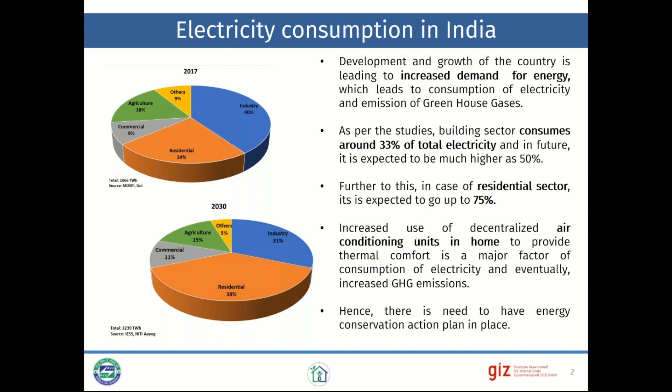Also, we have realized over time that the way we live is changing. The concept of thermal comfort that we demand is changing. We want more and more thermal comfort in our houses, and we need to check whether this kind of thermal comfort is being offered by way of energy efficient means. So there is an opportunity to save energy while giving comfort to people.

We have also observed in the last few years that electricity consumption in India's domestic sector is going up, with percentage growth of almost 9 to 13%. Post 2017, and even now after COVID, we are going to think of our indoor environments differently. We may need more air ventilation rates in our buildings so that indoor air remains healthy and clean. So things are going to change, and we predict that the demand for energy in the residential sector is going to go up.

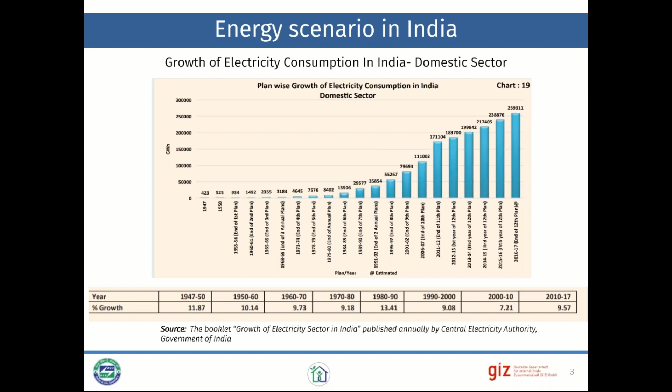So what has changed in the last few years? We have seen that in vernacular architecture, there was a lot of thought given to the environment. There was a very inclusive approach towards dealing with the indoor and outdoor environment. Architects considered the outdoor environment before designing the indoor environment, and what separated outside from inside was the envelope. When we say envelope, it's not only the envelope, it's the entire form of the building.

So in vernacular architecture, people took care to add more air into the building while restricting the heat coming inside. Even when the British came to India, they also had a very sensitive approach, and they dealt with fenestration in a very sensitive manner.

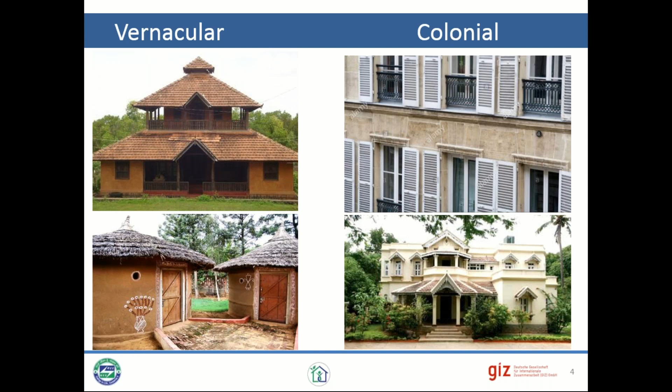This is what has happened to us now: we don't see any shading devices, we see a very casual approach towards designing fenestrations, and finally there is a lot of tussle between aesthetics and efficiency when we think of envelope design.

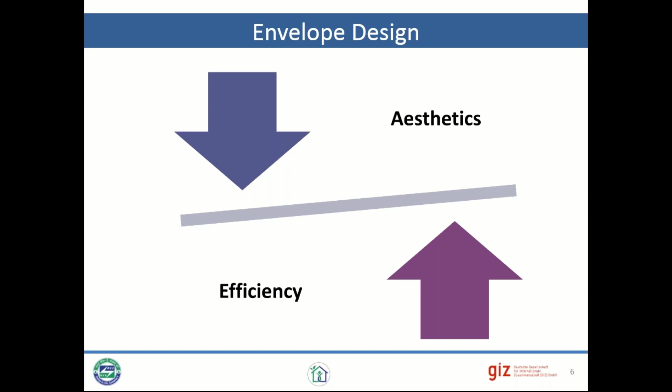As Saurabh sir had mentioned already, if a building is designed well, we capture energy efficiency for a longer period of time, because the equipment used inside the building can change and doesn't cost much, while changing the entire envelope of the building can never really be thought of at the operational stage. So it's very important to capture energy efficient measures in the envelope design and work towards efficiency while balancing aesthetics. This is what has happened to our facades nowadays.

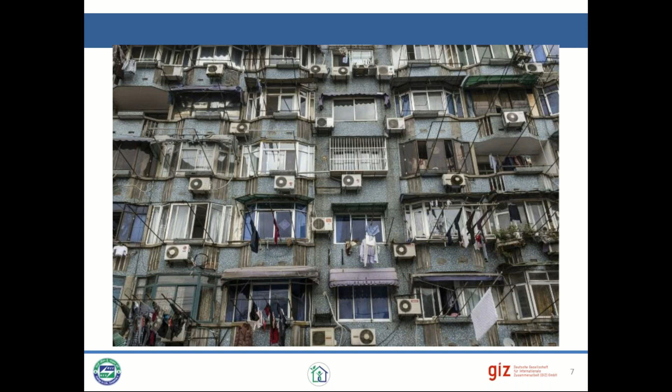You see a lot of air conditioners acting as components for aesthetic glamour on the facade. It's not only the facade architecture which is changing, but also the demand of energy, which is because of these air conditioners happening in the domestic sector.

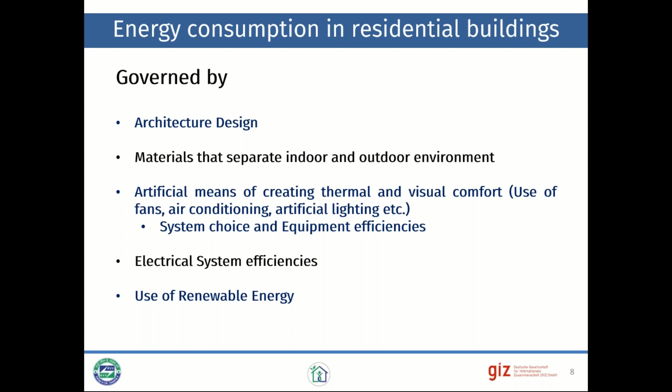So energy consumption in residential buildings is typically governed by architectural design, materials that separate indoor and outdoor environments, and artificial means of creating thermal and visual comfort. That would mean your choice of equipment and systems, electrical system efficiencies, and whether we can really go and use renewable energy. These are the factors we need to consider when putting in the seed for energy efficiency in residential building design.

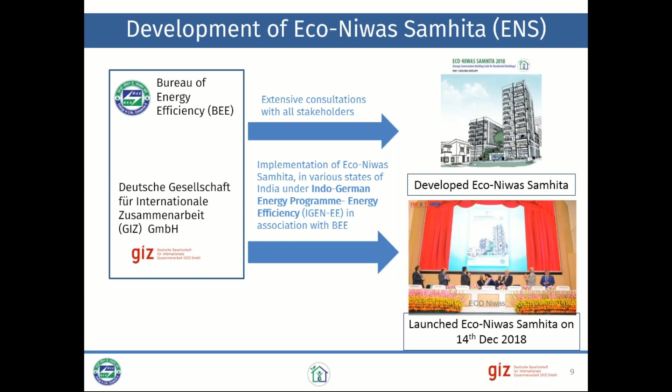So with this thought, the Bureau of Energy Efficiency and GIZ came out with Eco Niwas Samhita in December 2018, and it was launched and offered in the public domain so that people could start trying to use this kind of a code which can help capture energy efficiency.

The Eco Niwas Samhita had a major aim, and the first aim was to create comfort for people. The aim of Eco Niwas Samhita is to ensure daylight, natural ventilation, and reduce heat gains and heat losses, which would affect the thermal comfort of the people inside, and then later promote energy efficiency. So the code is talking of giving comfort at the same time giving energy efficiency.

The focus area of the code typically looks at building envelope, the mechanical systems and equipment in terms of your fans, your air conditioners, interior and exterior lighting systems, and electrical systems, the way they are designed and whether we can really use renewable energy.

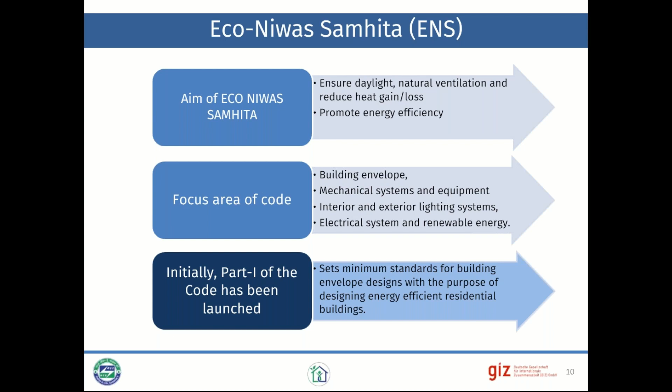Initially, part one, as Vikash sir mentioned, would be looking at capturing energy efficiency by way of architectural design and envelope design. The second part, being launched maybe coming year, would look at artificial systems. Right now, part one concentrates on solar passive architecture or climate responsive architecture, where architects have a very major role to play.

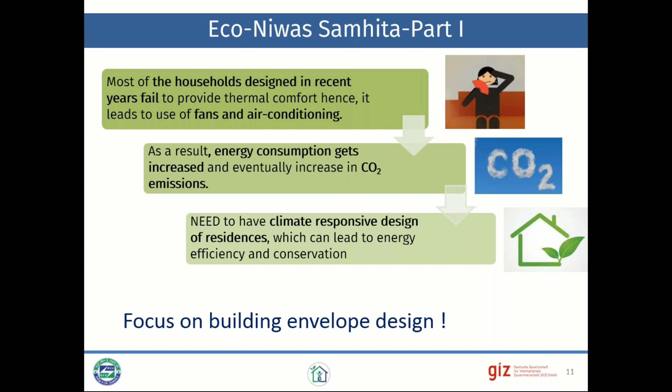So Eco Niwas Samhita part one is basically focusing on building envelope design and architectural design.

Now, how is this going to benefit the entire country? It is not only going to benefit individual users, but the entire country in terms of reducing energy savings by 125 billion kilowatt hour. It is also going to have energy savings of almost 20% compared to a conventional building, and also look at the national targets of reduction of CO2 emissions, which is almost about 100 million tons of reduction of CO2.

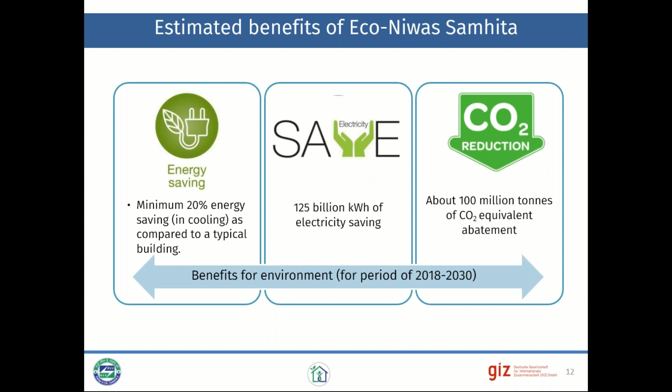And for individuals, of course, improved ventilation, thermal comfort, and availability of daylight, a healthier environment, which is becoming more and more the need of the times, and reduced electricity bills. So there is a win-win situation, not only for the entire country and the world as such, but also for the individual.

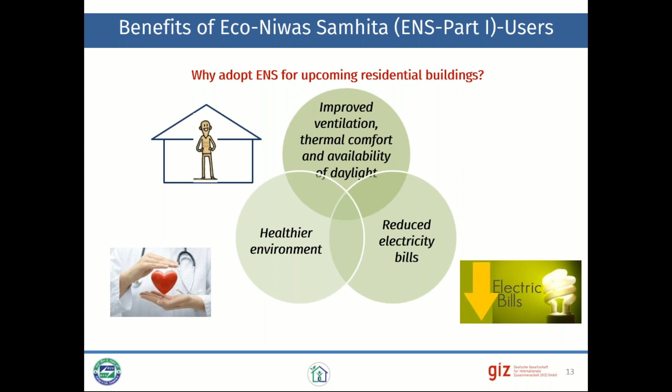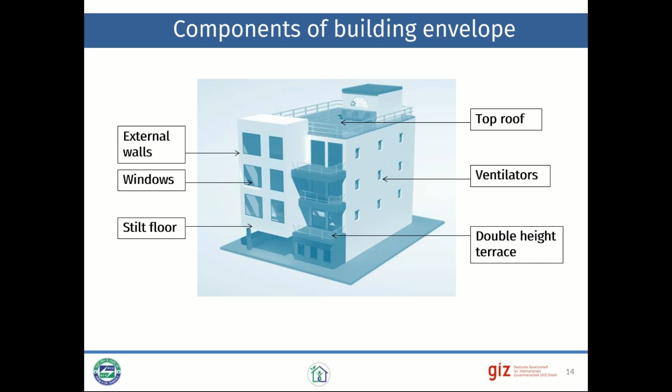Now, what are the components of building envelope that need to be looked at when controlling the energy utilization of the building? One is the external walls, the roof, the windows, doors which are on the external, if there are any ventilators, if you have any terraces, those can also be looked at as roofs, because that is where the heat is going to come in. And of course, the stilt floor if you have parking on the lower floor. So these are the components of building envelope which need to be concentrated and focused on when looking at your architectural design and choice of materials.

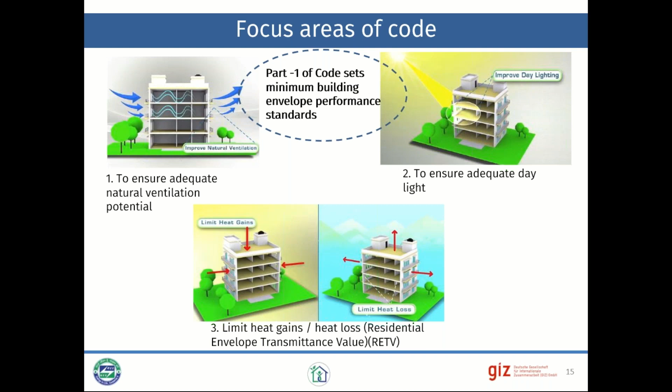So part one of the code sets minimum building envelope performance standards by way of ensuring adequate natural ventilation potential, also ensuring adequate daylighting, and looking at limiting heat gains and heat losses from the residential envelope, which is called RETV, which I'm going to explain later in the further slides.

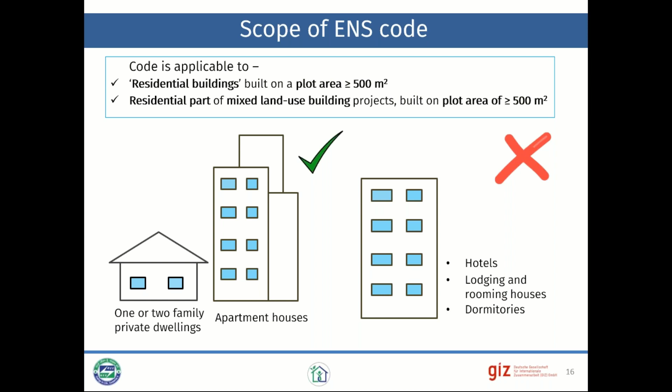The scope of the code is applicable especially to residential buildings with a plot area greater than or equal to 500 meters square, and the residential part of mixed land use building projects built on plot area of more than 500 meters square. One family house, bungalow, two family house, row houses, apartment houses are covered and are in the scope of the ENS code, while commercial buildings which are used for residential purpose but which are commercial, like your dormitories, hostels, hotels - all these will not come under the purview of the ENS code.

Now, whenever we think of looking at energy efficiency, like I said earlier, our predecessors had looked at the climate, and then designed the envelope or then designed the architecture. So it becomes very important to look at the climate zone where the building is being built.

Once we realize that energy consumption of a building necessarily happens to keep people indoors comfortable, and when the climate is putting stress onto these kinds of comforts, people tend to use artificial means, which then utilizes energy. So we have to understand that if a residence is in a climate with maximum climate stress, like a hot-dry climate where you are going to have a lot of heat stress happening, compared to a temperate climate where probably the heat stress is not so much.

So a residence built in hot-dry climate will need more energy to keep people comfortable. And one of the primary aims of the code is also to look at whether people are comfortable inside. So when the code talks about certain benchmarks, it takes help of this climate zone in India to set the benchmarks. So the benchmark for energy consumption of a residential building in a hot-dry climate would be slightly higher than the benchmark for a temperate climate.

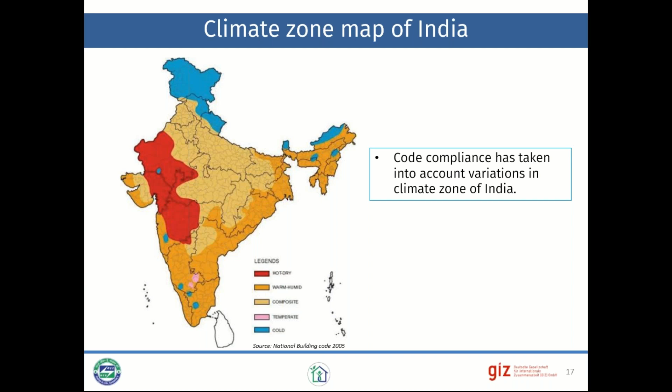When we look at Maharashtra, a lot of work had happened earlier, and you find that Maharashtra has been divided into different talukas, and each taluka has a climate. This reclassification of climate in Maharashtra was done pretty early, and there are 4 different climate zones: cold, composite, warm humid, and hot and dry. So when designing in Maharashtra, you may have to refer to these climate zones and look at the benchmarks given for them in the code.

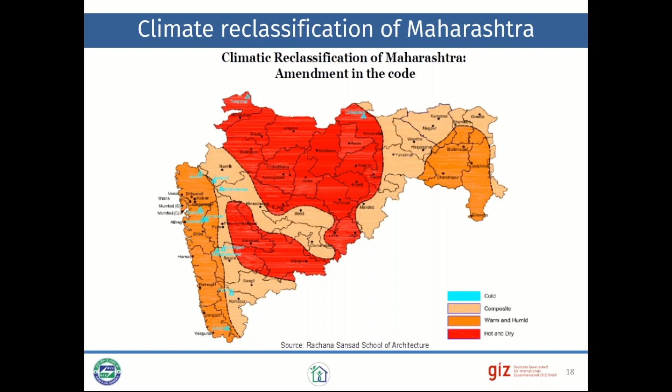Now, what are the code provisions? In summary, the code looks at natural ventilation, daylight, and heat gain and heat losses. So it controls these things.

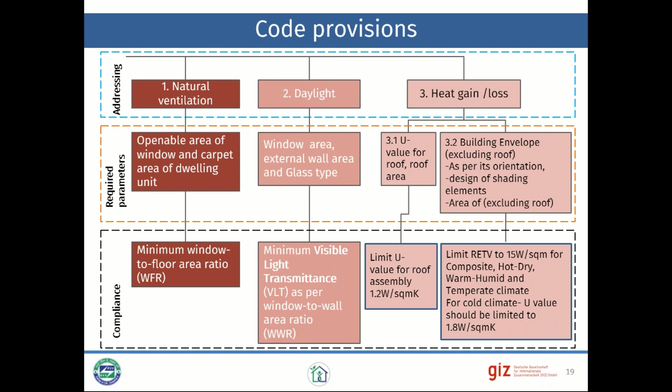In what way does it control? Natural ventilation is controlled by way of the area of windows compared to the carpet area of the dwelling unit, and it also looks at the minimum window to floor area ratio. When assuring provision of good daylight, it talks about the window to wall area ratio, the glass type being used, and the property of the glass which allows light to come in. And when controlling heat gains and heat losses, it looks at the thermal properties of different building envelope materials, whether opaque or transparent.

So when we look at the first aspect where the code talks about natural ventilation, it controls the openable area of window compared to the carpet area of the dwelling unit, and it also looks at minimum window to floor area ratio. What is the provision given?

Here you see in the picture a window, typically like a casement window, and you'll find the term openable area of window. The openable area of a casement window is going to be different compared to a sliding window. So it is not just the opening given in the opaque facade, it is the way the window is chosen - whether casement, sliding, 2-track, or 3-track. Even though the opening in the facade is the same, the openable area of the window can change.

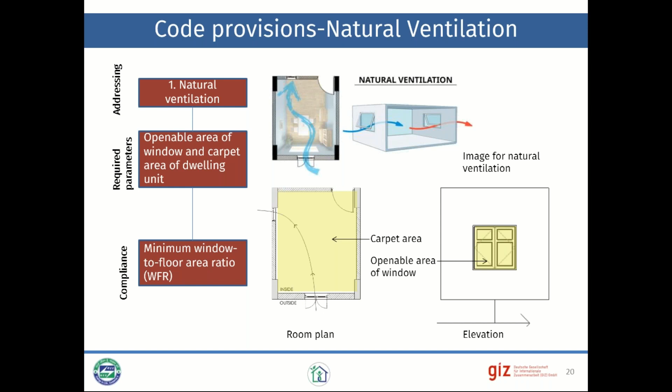So the provisions are such that minimum openable window to floor area ratio, and minimum window to floor area ratio with respect to the climate zone, shall not be less than given in the table. You will have to look at the building and the climate zone in which it is being designed, and then look at an appropriate minimum window to floor area ratio. You will have to give your window area more than this minimum, as benchmarked by the code.

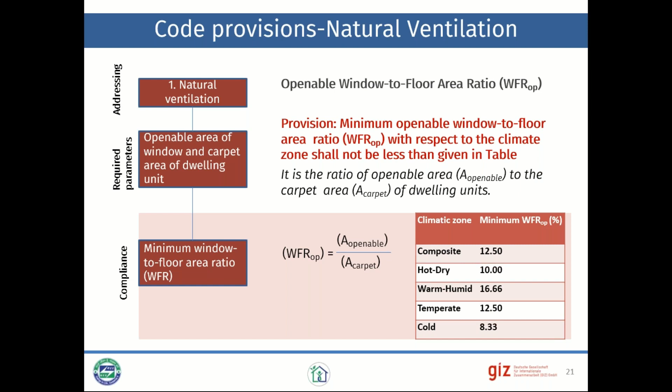Now the next provision is about daylight, and the code talks about how you can assure enough daylight is available by way of window area compared to the external wall area, and of course the glass type. So it's not only the opening, it's also the material of the opening, which is the glass. At times you may have louvers, so how do you deal with those? It will look at the visible light transmittance, which is actually the daylight that can come inside compared to what falls on the pane.

So the visible light transmittance of the glass is a property of the glass, and you can read this property in the technical sheet provided by the glass vendor. This becomes very important, and you will have to understand that more the VLT, more daylight.

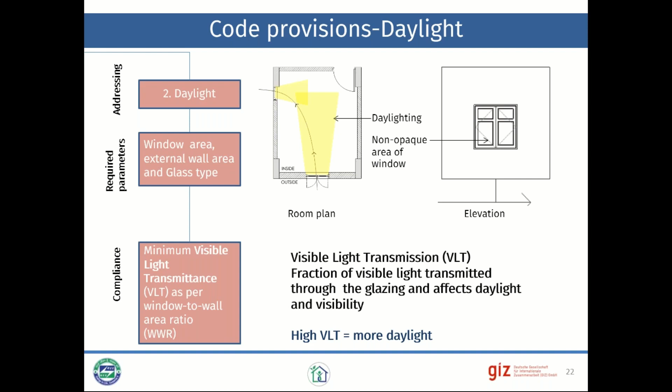The provision by the code says that minimum VLT of the glass used in non-opaque building envelope components, which are transparent or translucent, shall comply with requirements with respect to window to wall area ratio as given in the table. One understands that more the window to wall area ratio means more openings, means more daylight. So if you have more openings, you can use a glass which allows a little lesser light to come in - larger the amount of openings in the envelope, lesser the VLT can be used.

So it gives you the minimum VLT, which assures the amount of daylight that comes in. If you're assessing or designing a building, you will have to see that if your WWR is somewhere between 30 to 40%, then your minimum VLT has to be 0.20. This controls the kind of light coming in and assures good daylight for the occupiers.

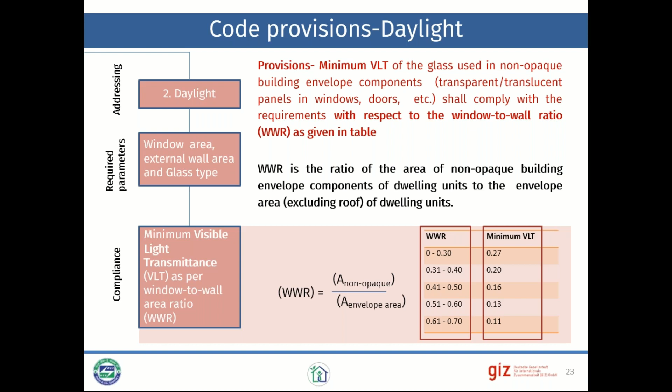Now the third part, which is control—the code controls the heat gain and heat losses that come in from the building envelope. These are the opaque assemblies specifically, so you have to understand the roof, the external walls, and the fenestration.

Because fenestration has certain material to it, we have to control the thermal properties of these materials to restrict the heat coming in or going out to achieve thermal balance. If you give thermal comfort to people through architectural design, they won't resort to artificial means for comfort. So the code provides that the thermal transmittance of the roof shall comply with the maximum U value of 1.2 watts per meter square Kelvin.

Now, what is this U value or thermal transmittance? Thermal transmittance, also known as U value, is the rate of heat transfer from 1 square meter of a facade when the temperature difference across this facade is 1 degree. Typically the unit for thermal transmittance is how much watts is coming in from 1 square meter when the temperature difference is 1 Kelvin.

So you now understand that lower the U value, which means lower the heat transmittance, which means lesser heat gain inside in hot climates, which means better thermal comfort and lesser energy consumption. So here the code specifically asks you to look at the roof assembly and gives a benchmark for the U value, which is 1.2.

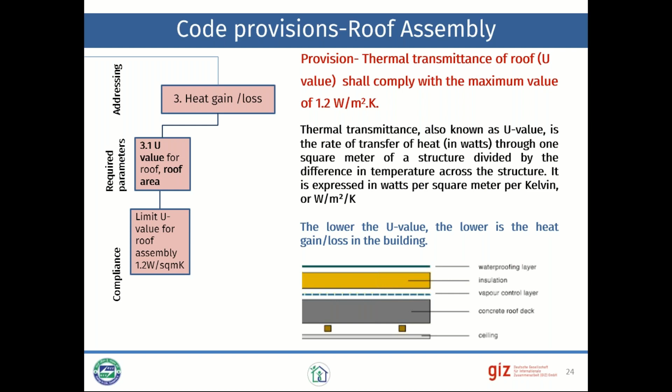Now what about the other envelope? The code deals with the roof separately and deals with other components of the building envelope separately. Why roof separately? Because we all know that the roof, or the horizontal surface, receives maximum solar radiation—almost twice that can fall on other surfaces. This data is available in national building codes, and you will relate that the roof is a major culprit in terms of heat ingress into buildings. So the code looks at roof differently and the building envelope separately.

Now, when we start looking at the building envelope except the roof, what all comes into picture? You see that wall material is very important. The U value of the envelope becomes very important, because it checks and controls the heat gain or loss happening through the wall.

Then there's the orientation of the facade on which the windows are placed. Typically, if the orientation faces the sun for most of the time, one easily predicts there's going to be a lot of heat gain by way of solar radiation. So when wall material is controlled, you're controlling conductive heat gains into the interiors, while when looking at orientation and openings, we're controlling both conductive heat gain and heat gain by way of solar radiation.

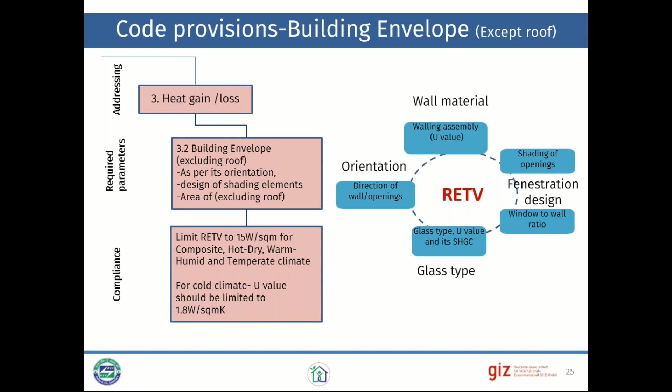So it's an integrated approach to reduce heat ingress and loss in a building envelope. It also looks at the material of the fenestration. With this integrated view, the code gives you a term called RETV, residential envelope transmittance value. This is a very important term and concept, giving an integrated control over all these 4 or 5 aspects of the envelope.

Residential envelope transmittance value is the net heat gain through the building envelope of the dwelling units divided by the area of the building envelope. The unit here is how much watts is coming in or going out per square meter of envelope. Typically, limiting the RETV value will help reduce heat gains from outside into the building and improve thermal comfort.

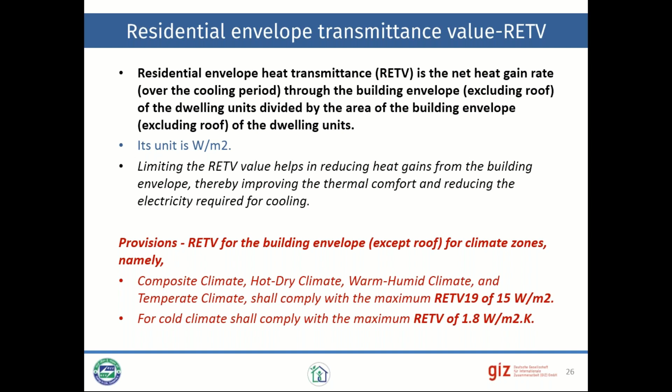So how does the code deal with it? The provision says that RETV for the building envelope varies by climate zones. So here climate zones come into picture, with different benchmarks. For composite, hot-dry, warm-humid, and temperate climates, it shall comply with a maximum RETV value of 15 watts per meter square, while for cold climate, it shall comply with a maximum RETV value of 1.8 watts per meter square Kelvin.

So what is the formula for calculating the RETV, and what does it consider? You will find that it has an integrated viewpoint of looking at walling assembly and its orientation. Thermal conduction is controlled from the opaque building envelope components, while solar heat gain is controlled from the transparent or non-opaque components of the building. So the formula takes into consideration these three aspects.

It also gives you an orientation factor, because as I said, orientation change would mean change in heat gains, since the solar radiation falling on different orientations is going to be different for different climate zones, for different latitude and longitude. There is one more aspect to this formula, which is A, B, and C. These are coefficients given by the code to tackle the orientation.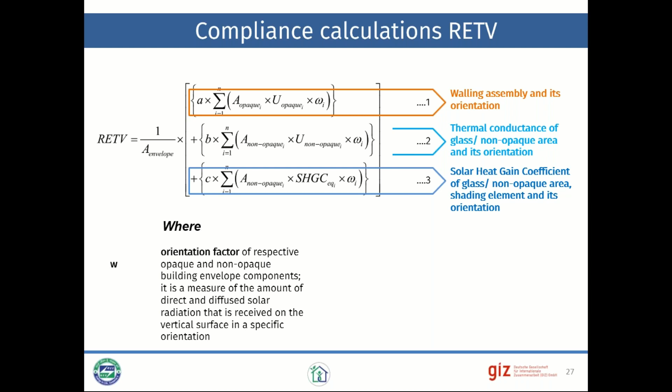Now, when we are looking into this code, the formula for calculating the RETV also allows you to take a different value for the heat gains that is happening through windows.

One understands that if there is a window and there is solar radiation coming in from the window, the moment you give a shading device, the amount of solar radiation entering the indoor space is going to be lessened. Now, how does this work? Let me first tell you what is SHGC.

Solar heat gain coefficient is the amount of solar radiation that comes in through an opening compared to what falls on the glass. This ratio is the solar heat gain coefficient.

Now imagine solar radiation falling on an opening, say let us consider it 100. If the glass has an SHGC value of 0.5, that means only 50% of this 100 is going to come in, which means the inside heat, that is solar radiation reaching the interior, becomes 50.

Now imagine you have given a shading device, and because of this shading device, not all of that 100 solar radiation will come in. Say only 75% will come in, which means the solar heat gain coefficient of that opening changes. So 75 is what is going to come in instead of 100, and with the glass having a 0.5 SHGC, 50% of 75 is somewhere around 37.5. So only 37.5 will enter, even though the outside solar radiation is 100, which means the solar heat gain coefficient of the entire opening, not only the glass, the way the opening behaves, changes.

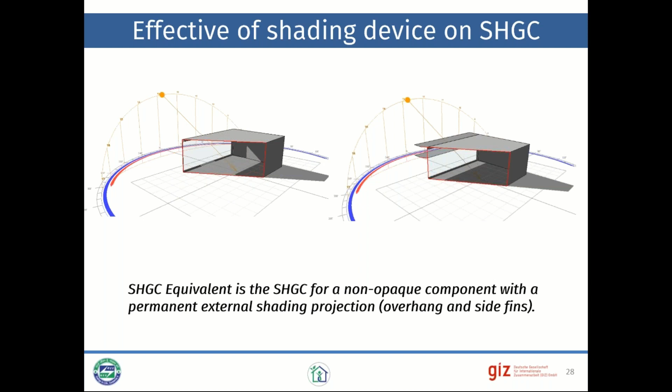So with a solar shading device, you're able to reduce the effective SHGC, and this is what is being considered in the code as well. Once you know the effective or equivalent SHGC, it can be used in the RETV formula to calculate your RETV, which then has to comply to the code values given.

So step-by-step code compliance is what we are now going to go into. For composite, hot, dry, warm, humid, and temperate climate, this is the way you'll have to look at the compliance.

So first and foremost, look at whether appropriate ventilation is being given by way of checking your openable window to floor area ratio, and then check whether it is compliant to the requirements of the code.

Then you start looking at the visible light transmittance of the non-opaque building envelope, and then appropriately check the minimum VLT as per the WWR of your design and check whether it's compliant.

Move further, then you start checking whether the roof thermal transmittance that you have proposed in your design complies with the maximum U value of 1.2 watts per meter square.

Once this is done, then you can start looking at the entire integrated approach towards the envelope, except the roof, where residential envelope transmittance value needs to be calculated for your own design. And then you have to check whether it complies with the maximum RETV of 15 watts per meter square.

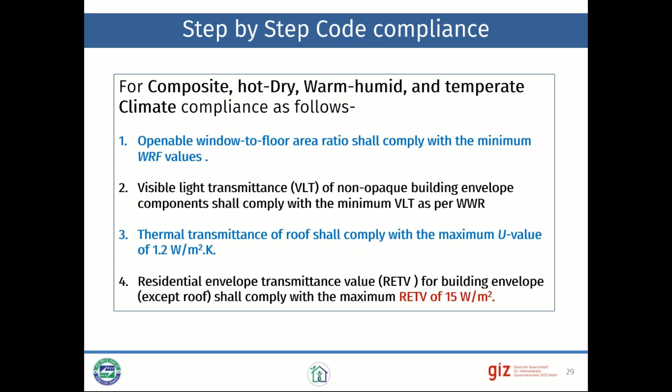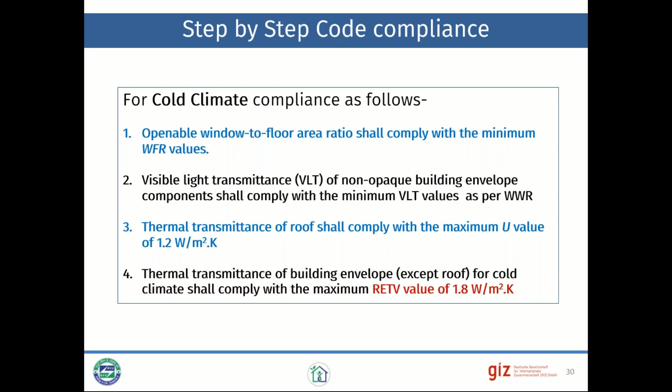Now, how do you check this compliance? BEE has already provided a tool—a Java-based ENS compliance check tool available on the Bureau of Energy Efficiency website for download. The link is given here, so those interested can download this tool and use it to check compliance.

It's a very easy to use tool, and you can start playing with it to understand how changing the WWR of your design, the walling assembly, or the roof assembly affects your compliance to the code.

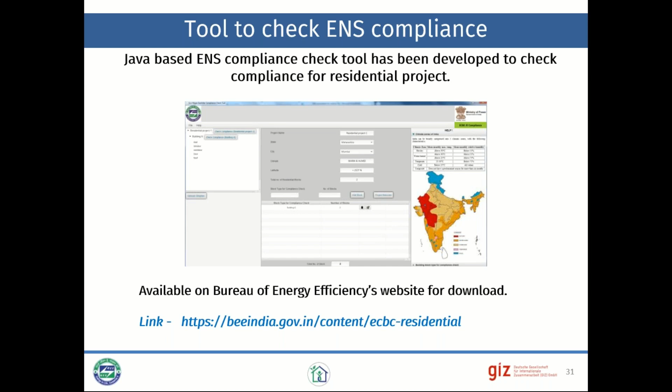With this tool, you need to enter data related to the building envelope—material, area, orientation, shading elements, glazing type, everything that needs to be looked at. Then compliance can be viewed for each building and a detailed report can be generated.

When looking at each building, we first look at the dwelling types and check compliance for each dwelling type. When all dwelling types are compliant to the code, the building becomes compliant to the code.

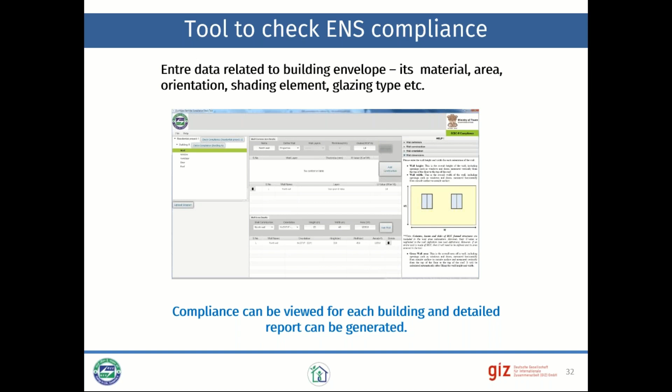So we are going to look at a case example to understand ENS compliance. If the case I'm discussing is not compliant for certain aspects, we'll change a few characteristics of the building design to achieve compliance. This will be a step-by-step way of achieving compliance.

Let's take an example in Nagpur, hot dry composite climate. It's a standalone building with P+5 structure, 10 number of buildings. This is a typical layout.

These details have to be entered into the tool—it's not online, you can download it, it's a Java based tool. So you can enter these things first, and the tool understands the context of the residential building.

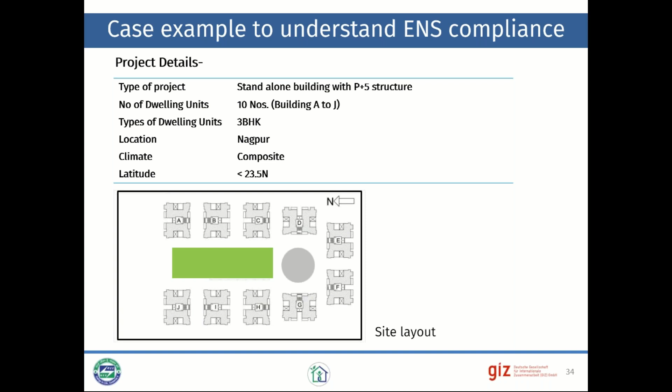So what is the method? First check building type, whether residential or commercial, across the entire site, and identify which are residential buildings versus commercial buildings—then look at only residential buildings. Then identify a typical building with respect to its planning, and check orientation of the typical building. If a plan has different types of buildings, all buildings will have to be taken separately and shown compliance too.

Further, check configuration of the dwelling units in the identified typical building and understand the number of various types of dwelling units. If you have one typical dwelling unit which is maybe 10 in number, you need not do the compliance check for all—if you've done one typical, all others will be compliant. Except a typical dwelling unit would also need to consider the same orientation. So if you have the same plan but it changes orientation, then it is not a typical dwelling unit.

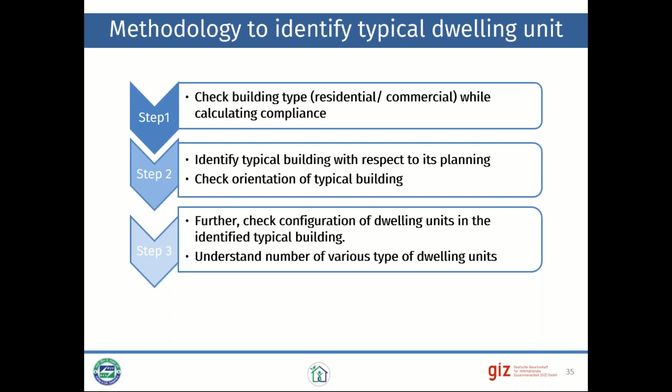So for showing ENS compliance right now, when I'm demonstrating, I will take only one building and one typical flat to show compliance. You can repeat this kind of thing for other orientations and other buildings.

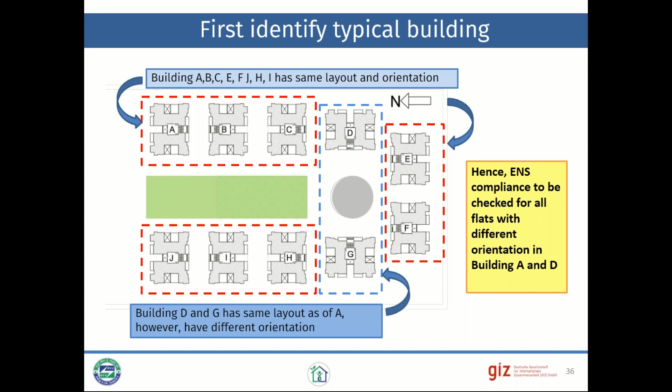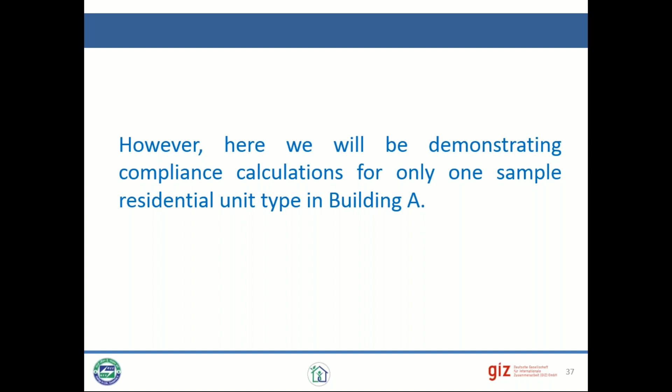So we are demonstrating compliance for only one sample residential unit type in building A. There are two flats with the same planning but different orientation, so they are not a typical type—these are two different types, and we are going to show compliance for only one unit.

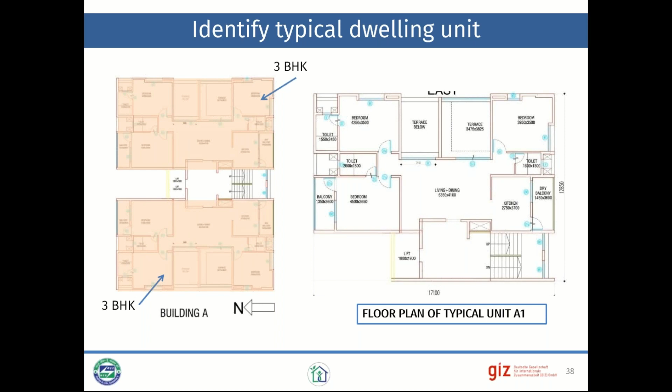Let's start understanding the building envelope details of this particular dwelling unit or flat in the apartment. The wall assembly is typically 230 mm solid burnt clay brick with 20 mm external cement plaster and 15 mm internal gypsum plaster.

The roof assembly is 180 mm thick RCC slab with 25 mm dense concrete on top, 100 mm thick brickbat coba, 15 mm finished with IPS flooring over 25 mm concrete laid to slope to drain away water. Windows and sliding doors are 5 mm thick single clear glass with aluminum powder coated frames. Doors are typically factory press laminated doors, 40 mm thick. Currently there are no shading devices provided for windows and glazed doors on the exteriors.

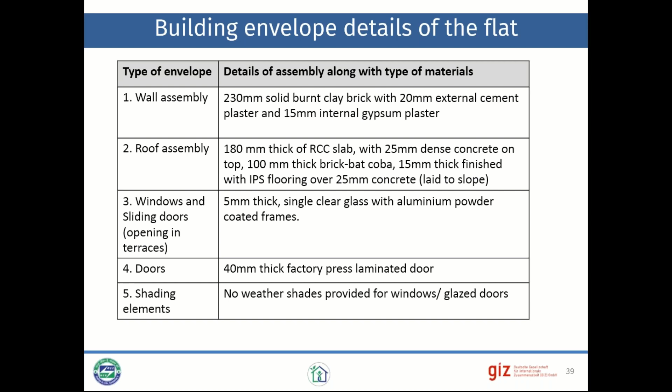Now let's start checking the ENS compliance. After entering all the details of building A and that particular flat into the ENS compliance tool, we find the compliance results, starting with window to floor area ratio for that dwelling. I'm not yet talking about the building as a whole - we have to do it dwelling by dwelling.

So WFR, window to floor area ratio, calculated value is 16.48, and compliance required as per ENS is 12.5 - that is the minimum compliance. So it is showing ENS compliance because it allows more ventilation and therefore better indoor conditions. The VLT, visible light transmittance, works out to 85%, while compliance required is minimum 27% for the WWR. So here also you find that the building is compliant.

Then we start looking at the U value of the roof, or the thermal transmittance of the roof. The calculated value is 2.06 watts per meter square Kelvin, while the compliance requirement is 1.2 watts per meter square Kelvin. So the U value of the roof is higher, almost double what is required by the code. This means it is going to allow more heat to ingress, and therefore thermal comfort is not going to be good - it shows non-compliant.

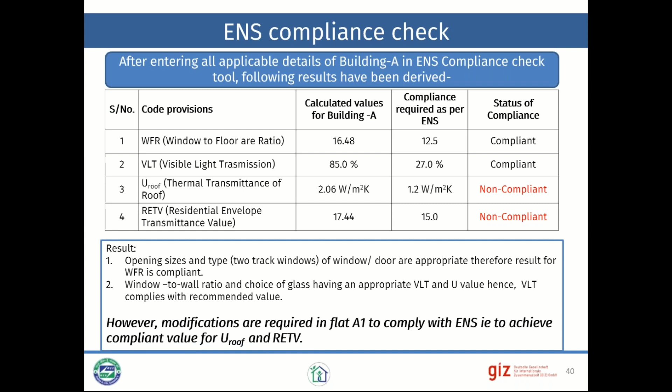So opening size and type, which is 2-track window and door, are appropriate, and therefore WFR is compliant. Window to wall area ratio and appropriate choice of glass with appropriate VLT and U value are chosen for this project - with correct VLT it complies with the recommended value. However, we'll have to do some modifications in flat A1 to comply with ENS and achieve a compliant value for U roof and RETV. So now we are going to see what we can do for the roof first.

When we look at the as-is roof, the U value works out to 2.062. Now we consider overdeck insulation for the roof and calculate the U value again. After calculating the U value, it needs to be entered with the respective floor area into the compliance check tool, which will overall calculate the U value for the roof and we check compliance. So the modified roof assembly with expanded polystyrene 50mm, applied as an addition to the roof assembly specification, gives a U value of 0.55, which becomes compliant with the requirement of ENS.

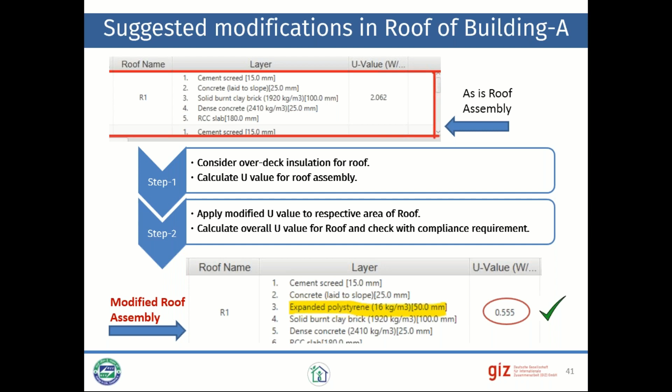Now when we look at RETV, we decided not to do all the measures at one time - let's try modifying the envelope one by one. First we check the as-is case for RETV compliance. If not compliant, we give an overhang shading to the window and check compliance again. If compliant, fine, but if not, we provide side fins to shade the window and reduce solar heat gains, then check compliance again. If still not compliant, then the architectural modifications aren't enough and we may have to change the material of the glass. Changing the glass means added cost, which is why we considered that iteration last - changing the clear glass to a high performance glass, maybe single glaze, and if that's not working, a double glaze.

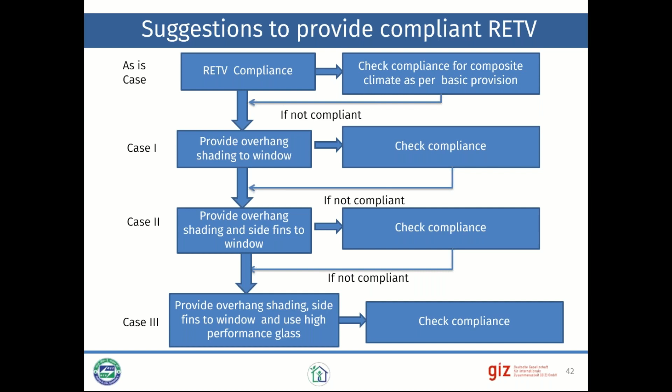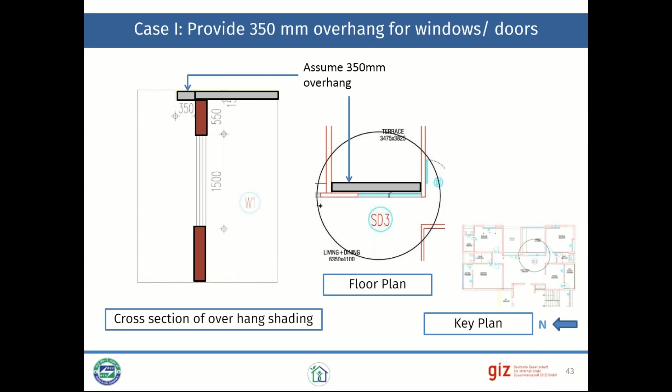So right now, case one: we try providing a 350mm overhang for windows and doors. In the section you'll find a 350 overhang, and in the plan also you'll find a chhajja given, 350 thick and wide. When entered into the online compliance tool, RETV for case one, with the modified horizontal shading device, works out to 16.55 watts per meter square, compared to 17.44 for the as-is case. So by giving a shading device, it has reduced, no doubt, but it's yet not compliant as per ENS, which requires 15.

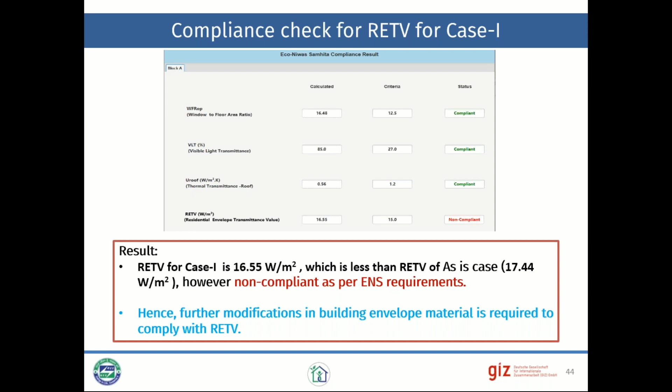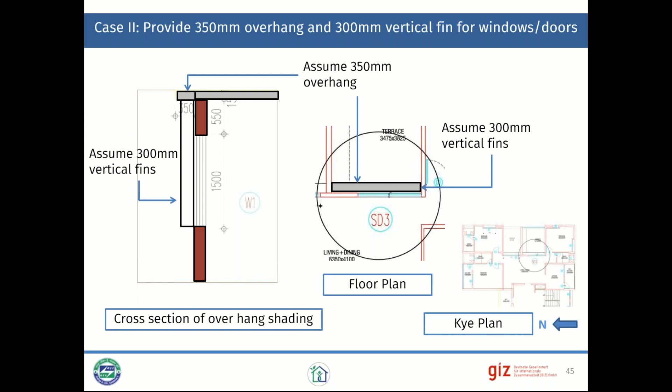For ENS you require 15, so we have to get the RETV down further. The next step is to give a side fin - assume a 300mm vertical fin to the opening. Once we enter that, we find the RETV has reduced to 15.87 watts per meter square, which is less than the as-is case, but still not compliant because it has to go down to 15 or less. So now we'll have to change the choice of our glass, and that is where we are heading.

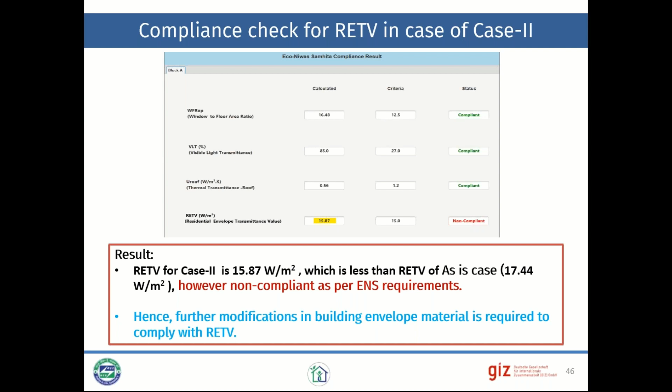So now we think of providing a single glazed high performance glass. We look at the different glass available and select one. Here we have selected the clear Cosmos glass with a solar factor of 0.29 and U value of 3.8. It is a 5 thick high performance glass with a lower U value and SHGC, with aluminum powder coated frame. We have not changed the frames here.

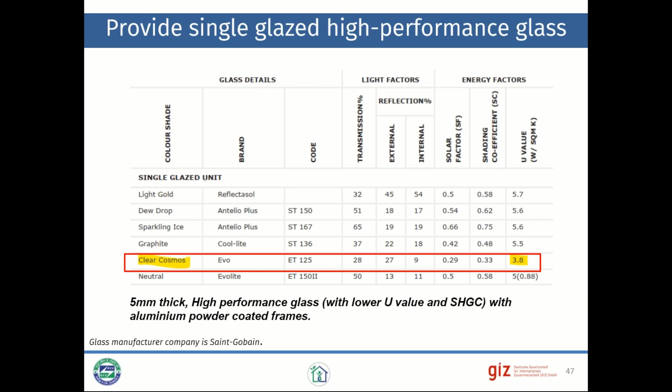Now what happens with this? Here you find that the RETV for this case, where we have changed the single clear glass to a high performance single glaze unit, we have yet not gone to double glaze, and we have been able to reduce the RETV to 14.88, which shows that it is now compliant to ENS requirements.

So you will find that by way of change of architectural design, by shading, giving enough shading to openings or windows and doors which are externally on the external facade, and by merely using a simple single glazed high performance glass and insulation to the roof, because roof is something separate, you are able to comply to the requirements of the code, which is less than 15 watts per meter square.

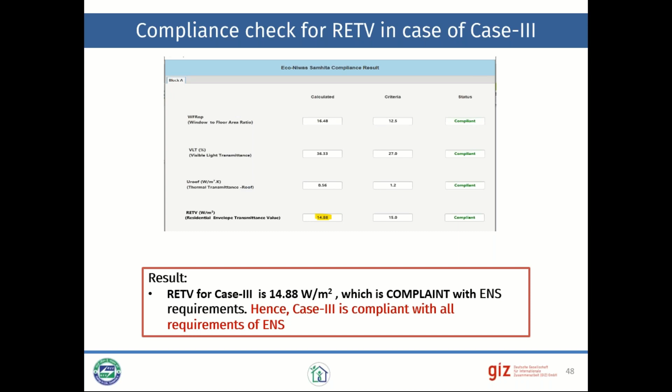So if these are the requirements for ENS compliance: WFRop 12.5, VLT 27. Now this VLT is read depending on the WFRop, URoof 1.2, and RETV 15.

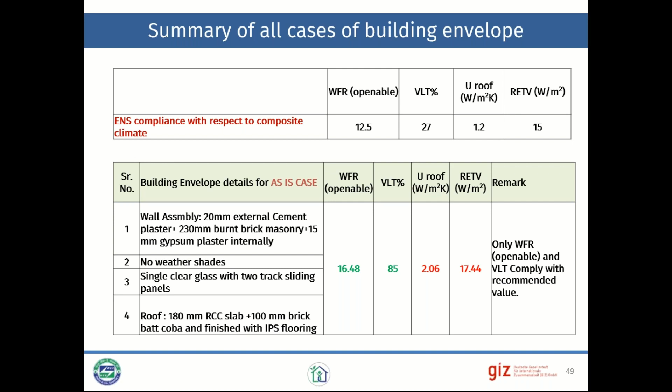So by giving an expanded polystyrene insulation 50 thick, you have been able to comply to the requirement of the code, which is URoof comes down to 0.56.

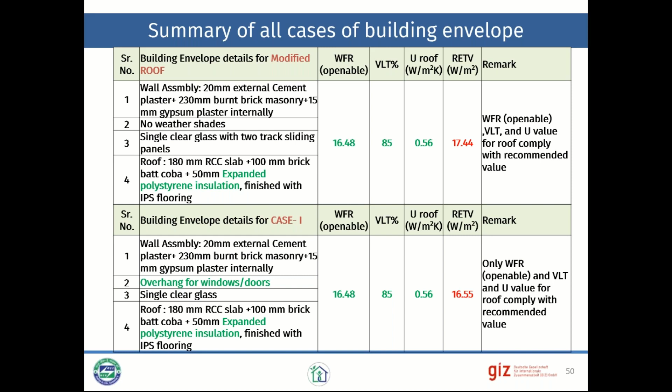The next case, where you have added an overhang, a horizontal overhang, you are yet not able to completely comply, but got down the RETV to 16.55 from 17.44.

Further, with overhang and vertical fins both given, you have been able to get it down to 15.87 watts per meter square. And further, which was not compliant again.

So then you have changed the glass from single glass to high performance with low SHGC and U value, and you have been able to comply to the RETV requirements of the code, which is less than 15, which is right now 14.88 watts per meter square.

So this is a way you can comply to the code by way of iterations in your architectural design, your orientation, your choice of materials specifically.

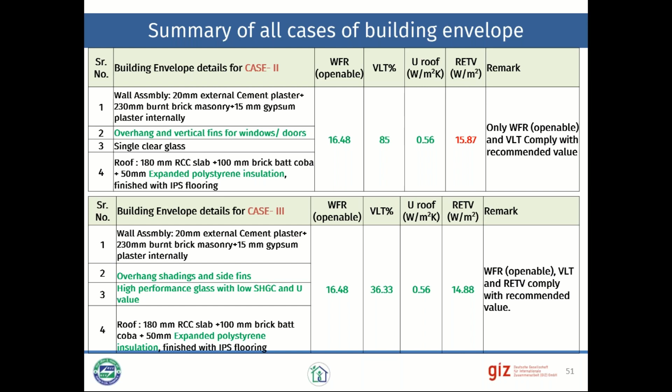So now, does it mean that if ENS is controlling so many things of the envelope, there is no flexibility for designers and architects? So it is not so. There is a lot of flexibility.

So you have flexibility to select a material for roof or walls. You have flexibility to design your windows. You have flexibility to design your architectural facades in terms of WWRs, the types of windows you are going to choose, whether they are louvered, non-louvered, casement, sliding, 2-track, 3-track. So all those things are possible.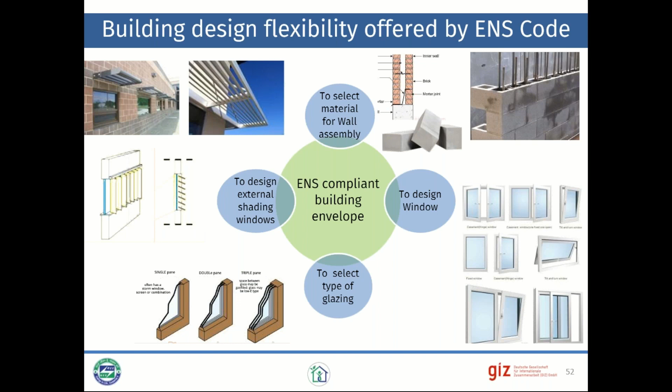You can also choose a very good looking shading device for your windows and doors, and there's a lot you can explore in terms of shading devices. And finally, selection of glazing types can also be looked at.

So some articulation in facade design is possible, by way of which you can easily make the building look interesting. There is a new architectural grammar which is now emerging. You know that when the Industrial Revolution happened and there was a lot of electrification, introduction of elevators, escalators, you found that great architects used these kinds of tools to modify the way the building looked.

You had the Lloyd's building where they placed the transparent elevator on the corners, and the building started looking different. So now is the time for architects to explore how architectural grammar can respond to the needs of the times, and what are the needs of the time to create comfort at lesser energy consumption.

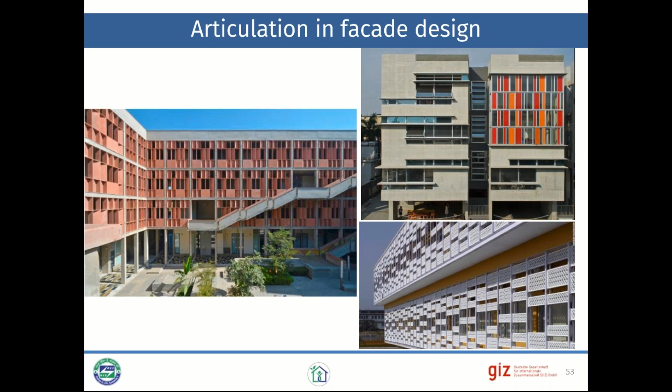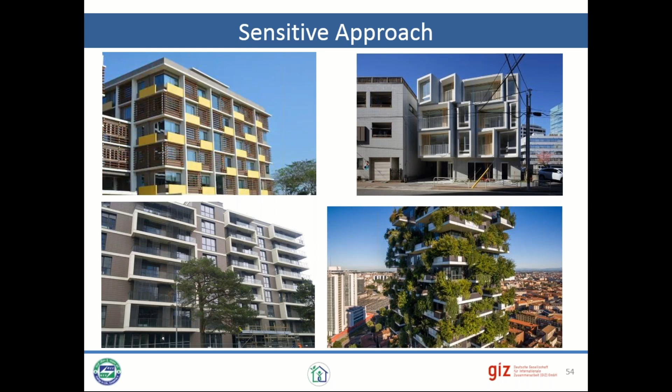So if you take that as your one-liner objective, that one-liner can drive you, can give you better opportunities for designing and articulating your facade design. So there is a lot of possibilities that you can really use. The code is not restrictive. The code is pretty flexible, allowing you newer approaches, giving you new directions, and probably a new grammar which is going to evolve in the future, where architecture responds to creating comfort, but not at extra energy.